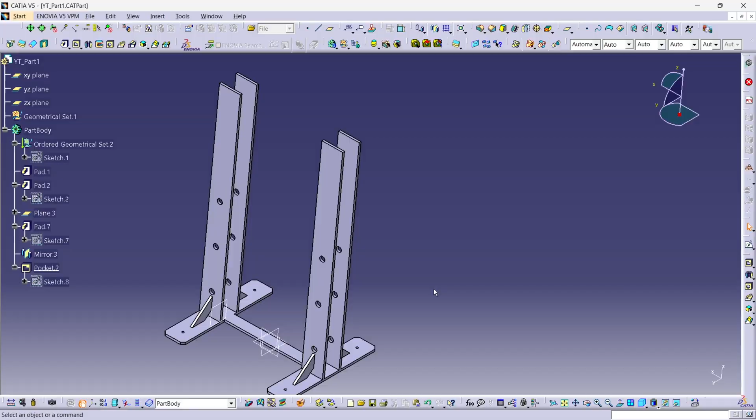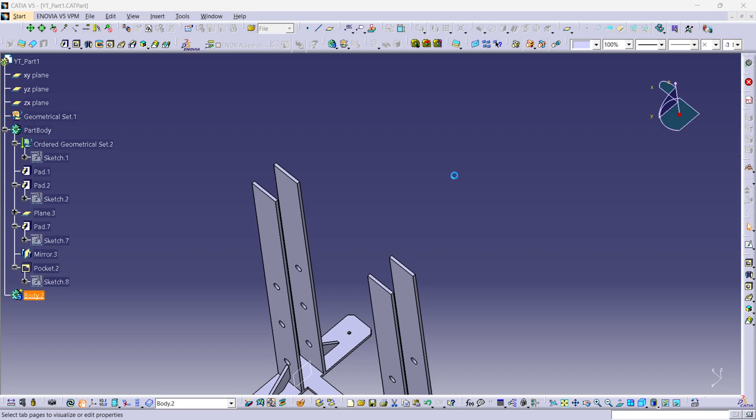Okay, so now we need to close this upper hatch, right? So for that we need to create another body. We will go for insert, select insert body, and name it as upper portion.

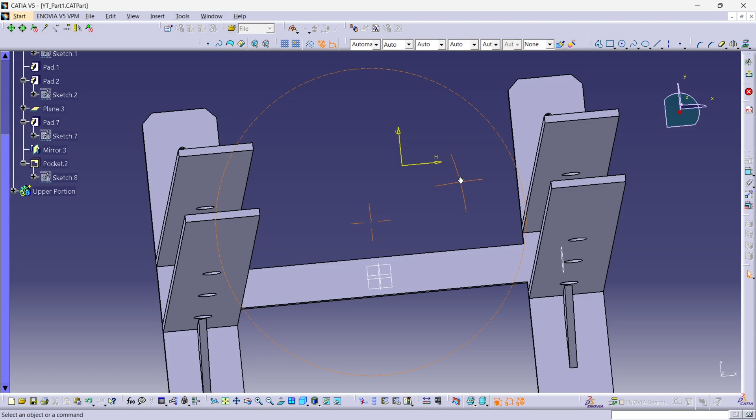Okay, select this surface directly and go for sketch. Now the question is how to cover this.

Okay, so first of all we will select the outer boundary, like this. That's a rectangle that I have created. Now I'm gonna select this, and this two should be coincident to each other. Oh no, sorry, wait a moment. Like this, right?

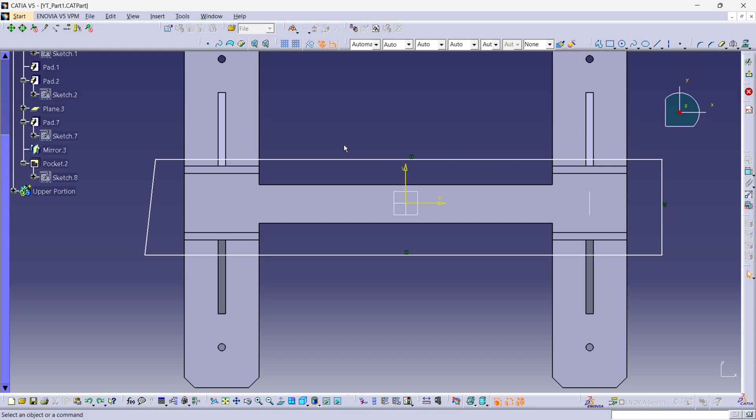Okay, we have another approach for that. Select this thing called projection, right? Yes, project this, this, this. It's done. Remove this one which you don't want.

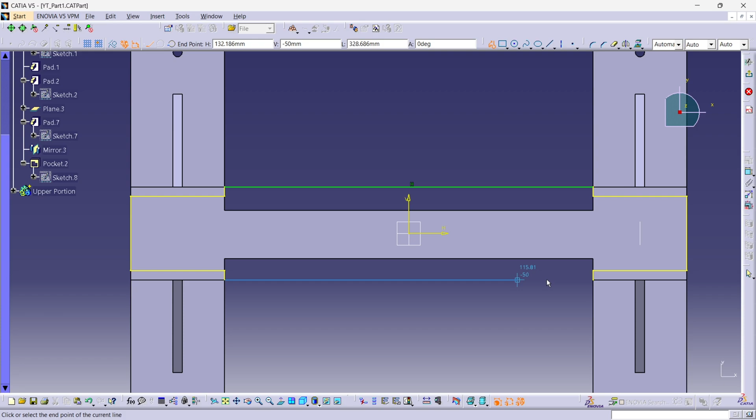Okay, so the yellow line represents our outer boundary. I just need to select this two to connect. That's it. Other one as well, the same. Escape, and we are good.

Come outside from here and just make an extrude, or we can say pad, in the lower direction with the dimension called 10, right? So it's a good thing.

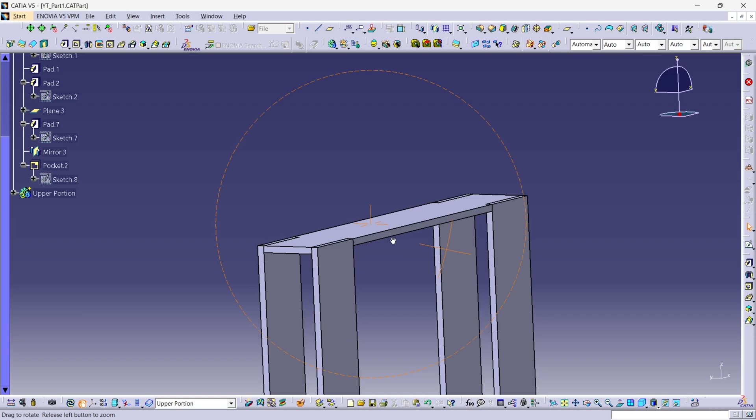Now we need to check what is remaining. I believe this is the remaining part only. So we'll create this particular thing. Okay, the 60 in the length, because this is not yet made.

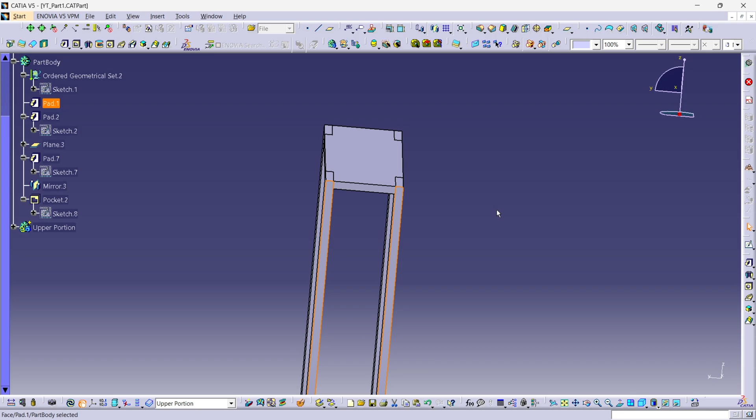Select the surface of this outside, go for sketch, and we need to create two rectangles like this. First of all we'll just select and create only one, then we'll have a mirror of that.

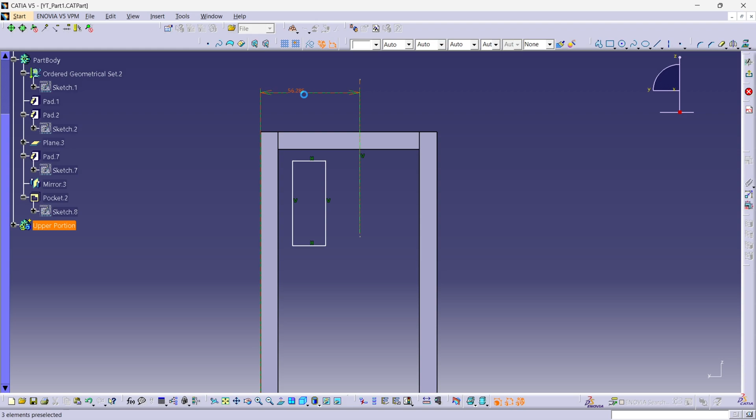The distance between the axes should be 50, right? Length should be 60 up here, and the width should be 14.

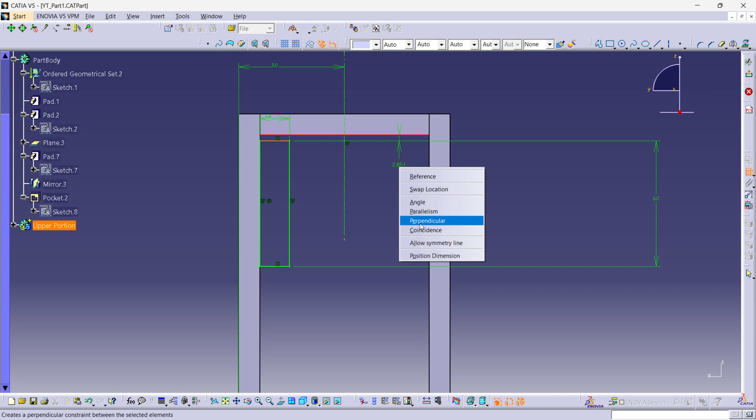Okay, now I just need to drag and drop up here, or make sure it is coincident with the frame. Coincident, that's it. Select this sketch, go for mirror to this particular plane, and there we go.

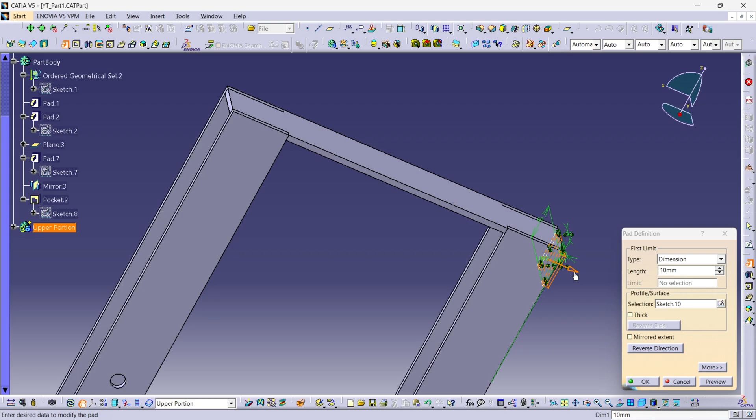Again the same thing, we'll go for padding, and we'll go padding to the next surface, which is this one. Okay, it's not accepting that. Up to the last. Impossible.

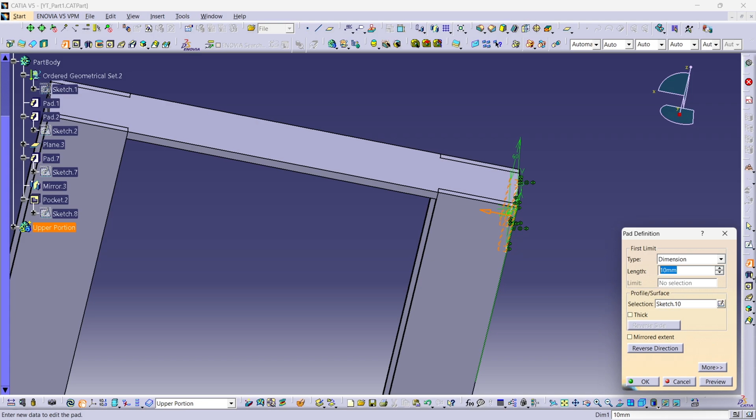Okay, so for now we'll go for the option called dimension in the reverse direction, and the whole length is I believe 500, right? No, it's more than that. Let me check.

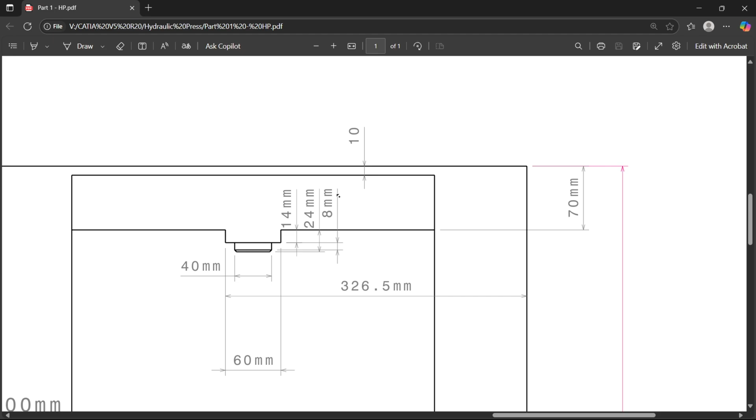Sorry, not here. Padding, right? So come up here and let's check the distance up here. The whole thing is... okay, there's none mentioned up here, so we need to go back in the design mode and check.

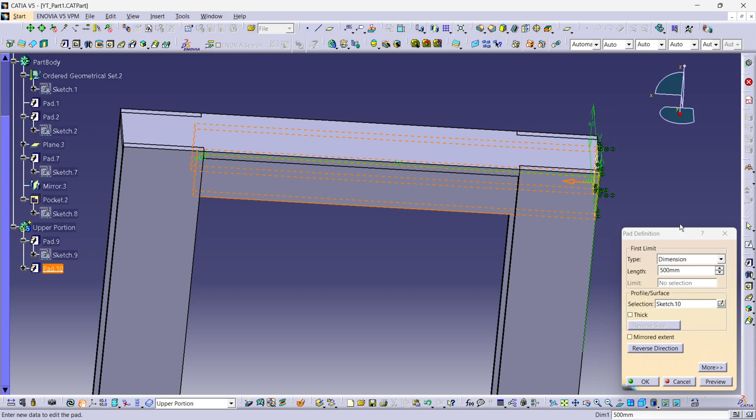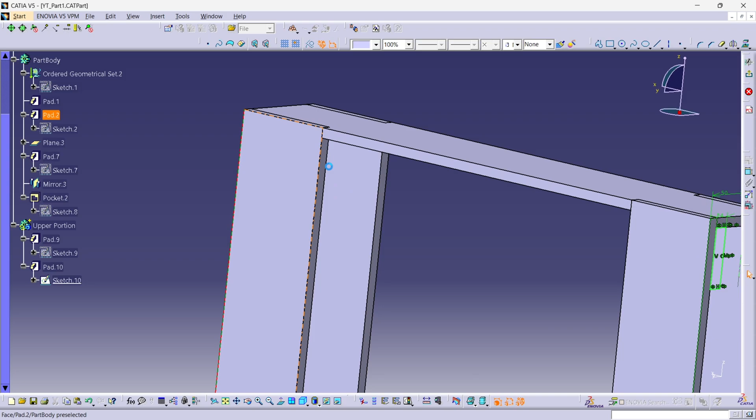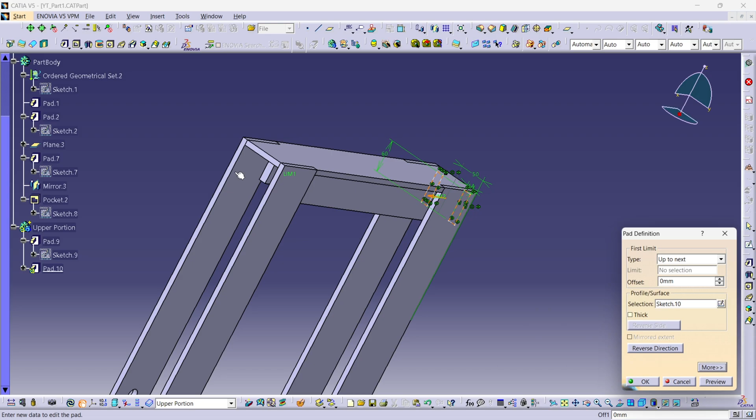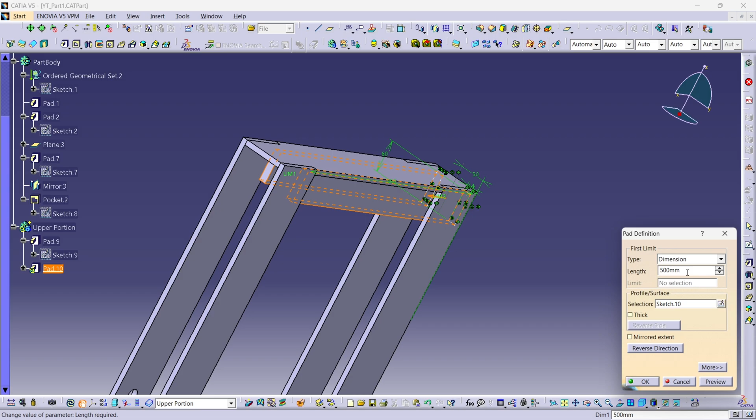Okay, fine, that looks good. Now you can proceed with the another thing, which is this one, right? Which particularly looks like this.

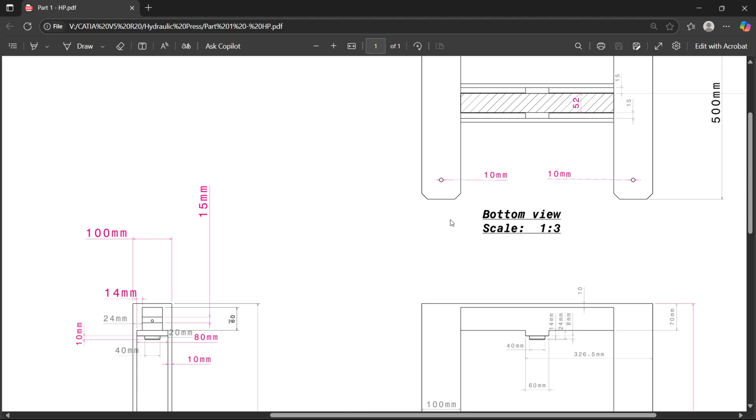So we'll create that right here. We can actually hide this upper body so we can see only this one to avoid the confusion. So again, I'm hiding this.

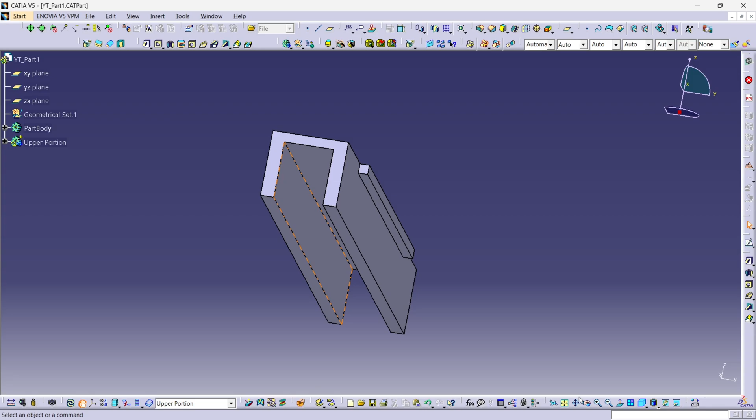So there are two ways. Either you can go up here to check the hidden part, right? So I'm just gonna go for show, and it's here. Okay, so for now we need to make this one, yeah, this one.

So the attaching clips are there, meaning it's attached to the frame itself, right? So yeah, let's just go and make that one here. For that we need to create a plane, which should be inside this thing, right?

Select this plane which we already created, and go for the option called plane. Make it in the opposite direction as 40 mm. Okay, so it is inside, yes, correct, it is inside this thing.

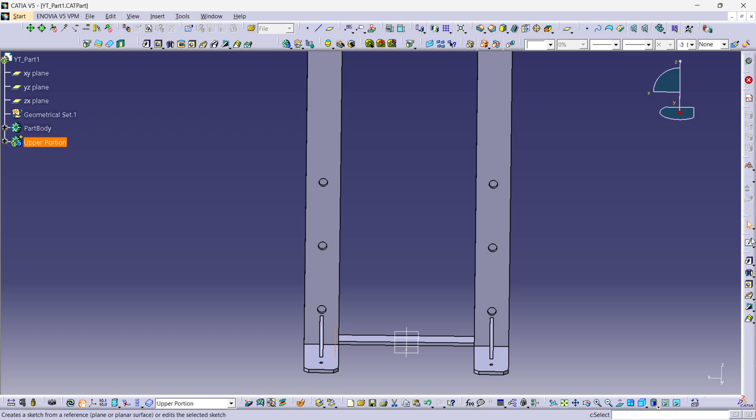I'm just gonna go select that particular plane, and go for design or sketch. Up here again, make a rectangle, simple. Okay, inside that I need a circle.

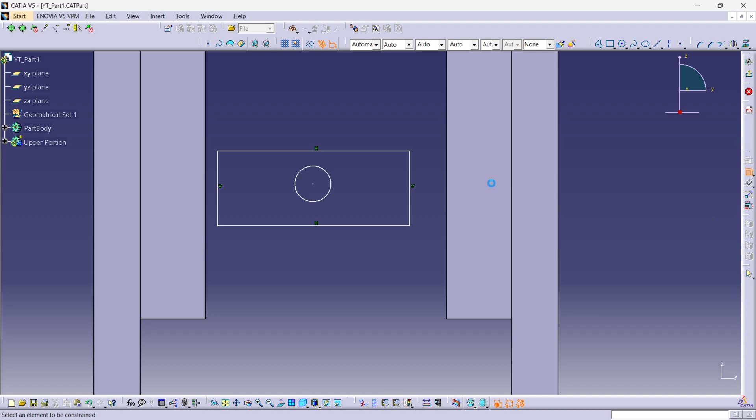That's fine. Time to make it constrained. Select this, control press, go for coincident. Same thing for the other side.

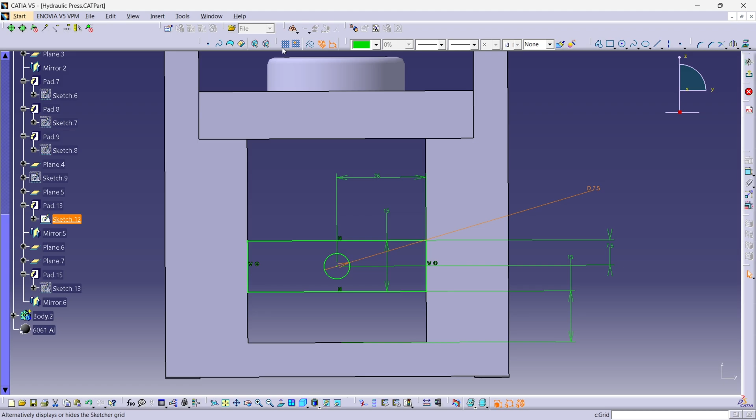Dimension of this is 7.5, okay, and the distance from this to this, that's a good question. Let's see from here how much it is. It is now 15 centimeter, sorry, mm. It's 15.

Okay, so that's fine, and it's 15 mm. And this is also, I just consider it as 15, and the distance from this to the center point should be 15 by 2.

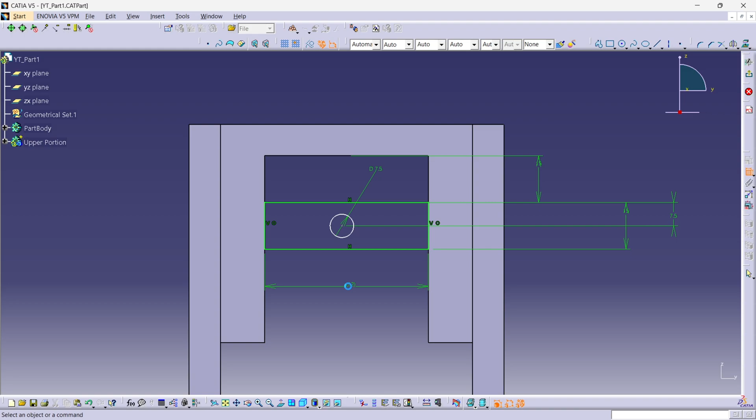Let's check the distance from this to this. It is 52. So 52 by half is 26, and that could be the midpoint, and that's it. Once you do that, go for exit. Now it's in this plane.

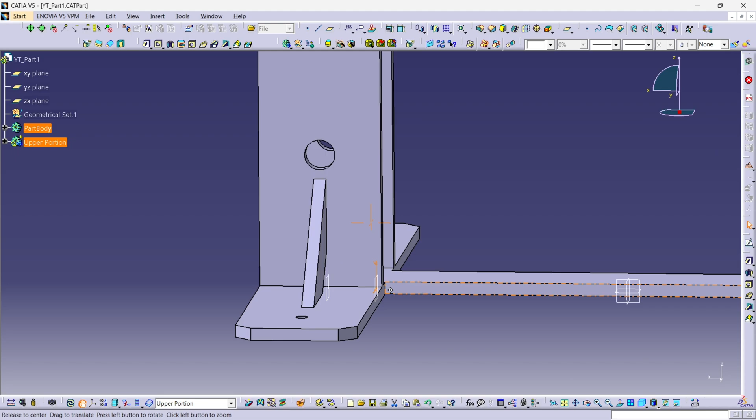So all I wanted to do is just create another plane up here. Select this, let's check where we are right now. We are here, no worries. Select this plane, go for this again, this time 20. So this is the one which we have just created.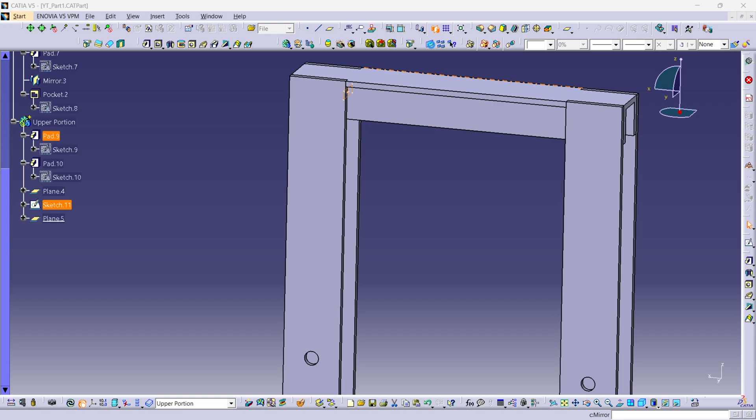So why do we need that? We need to make a mirror, right? So let's select the sketch, which is this one. I'll go for mirror. It says... let's just see. Oh no, not this one, not like this.

Let's just go for first, let's see if we can first make a padding of it, and it's 10 centimeters. Once we do that, let's just go for 5. That would be appropriate. 5, and go for mirror.

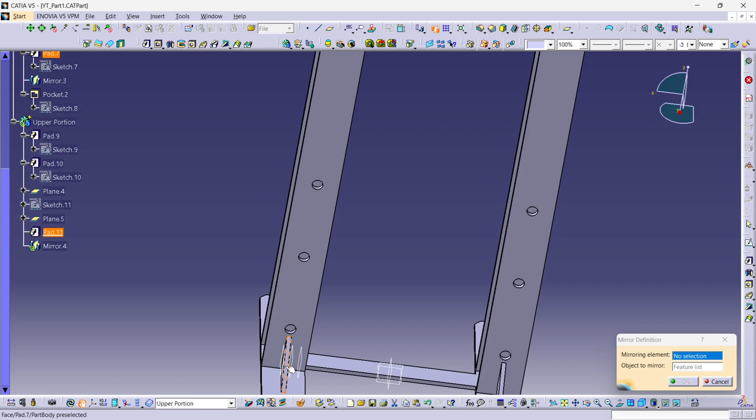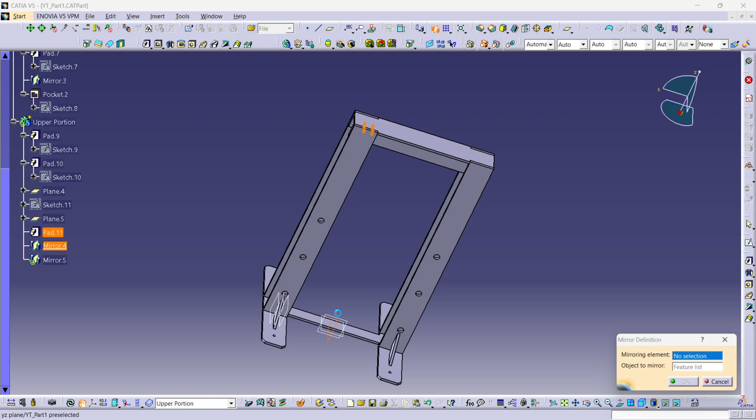To this plane, and let's see how it looks. Yep, perfect, that's it. Right now again, I wanted to mirror this too, which is pad and mirror to another plane, which is this one, and there we go. Create. Okay, it is there.

And this time I want a plane which is coming from here. Let's just find the distance from this to this first. This plane to this plane.

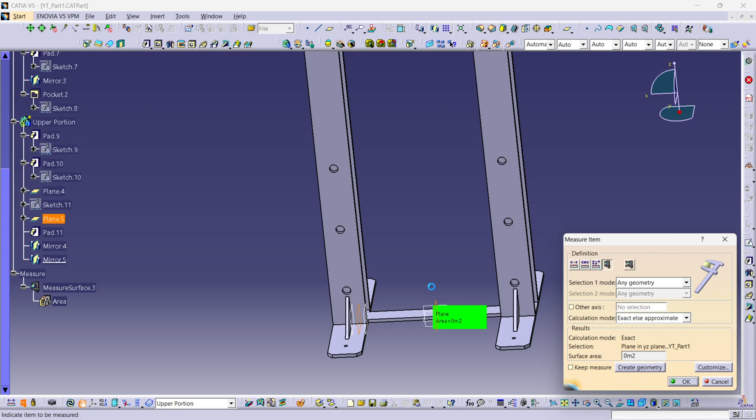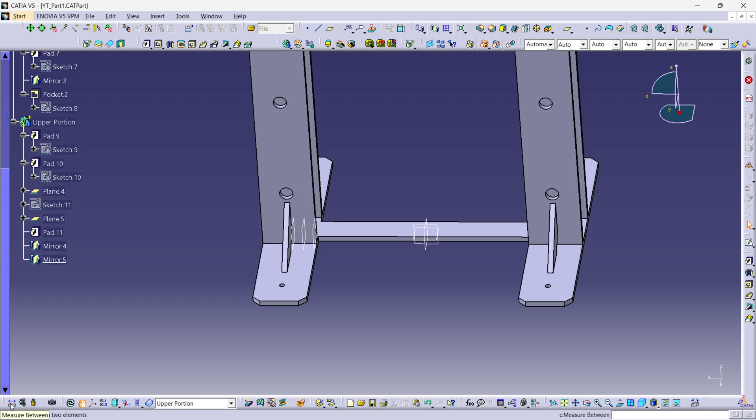Measure between this and this is 2 to 6.5. That's a good feature, you can always have that. It's called measure between, 2 to 6.5. Got it. Select the plane, 2 to 6.5 in the other direction, which looks good, right?

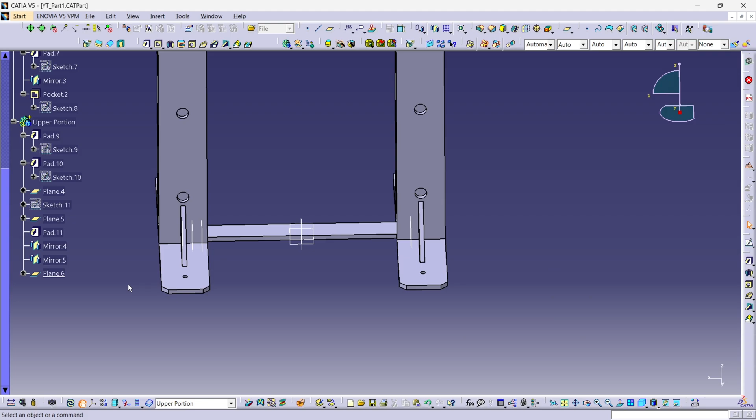And click on preview. This time select the mirror part, go for... it cannot be transformed. Why so?

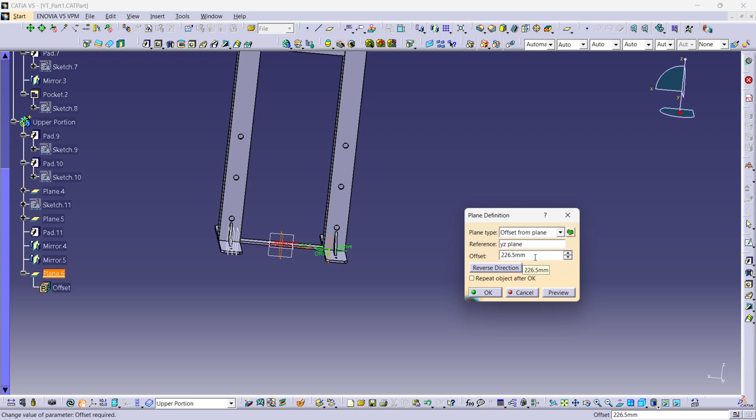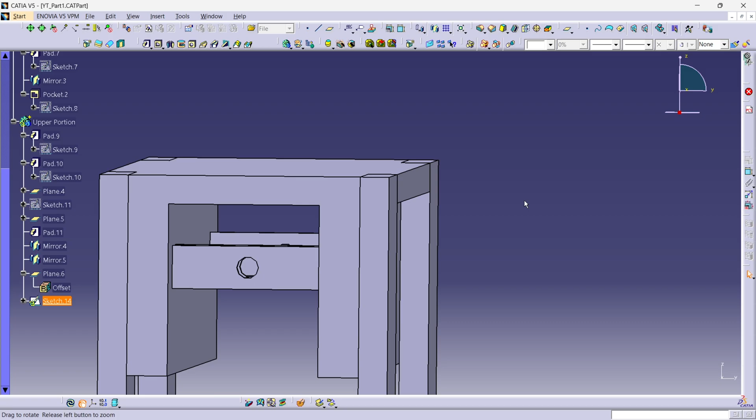Select this plane, go for sketch, and this time just select like this and go for projection, right? Go for out, and you can just extrude that part like this in the other direction, 5 mm, preview, and done. So similarly, we have created these 4 plates inside the structure, right? And that's it.

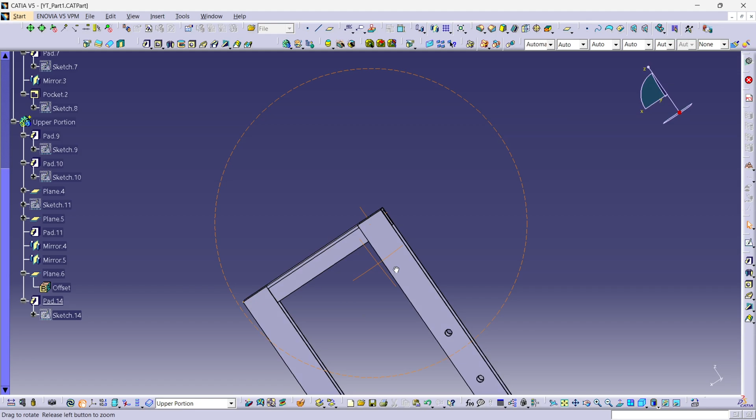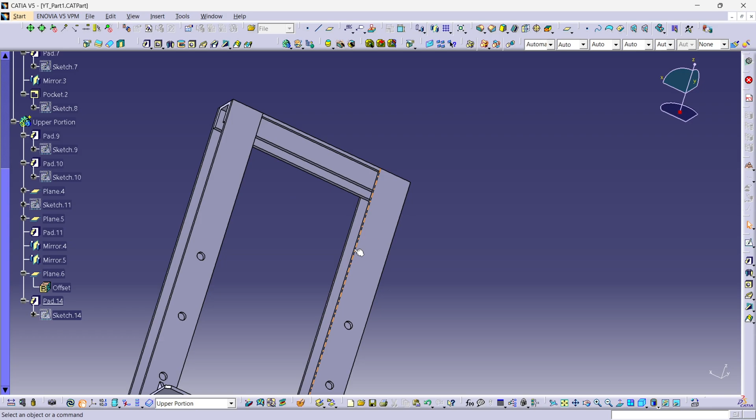Now we'll create this thing. So this structure is rectangular and this is circular, right? So for now we need to create the platform where this shaft, or you can say the rod, will attach, right? So for now, just hide the main body, and just select this thing, go for sketch.

Here we need to create a profile, make it coincident with it, and coincident. Distance between these two is, let's consider 60. And the width is 14. Got it.

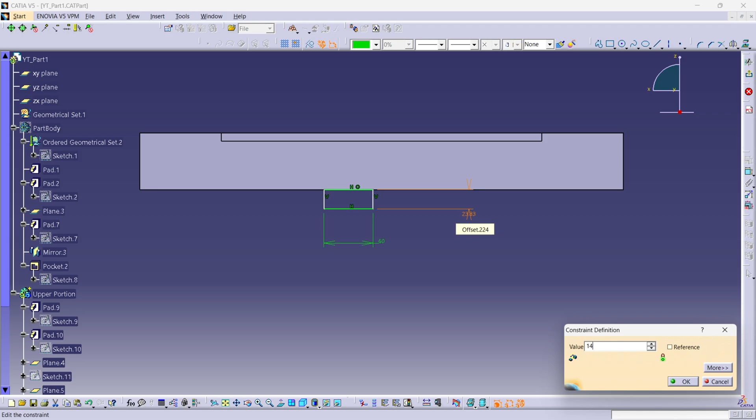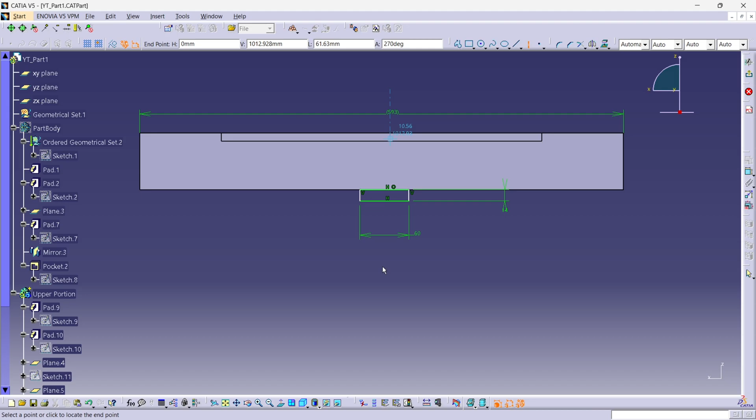And the next thing that is required is that it is in the mid distance, right? So we need to check this and this first. It is 593. So let's just make an axis first here, so we can determine it. Axis, and this should be a distance of 593 by 2.

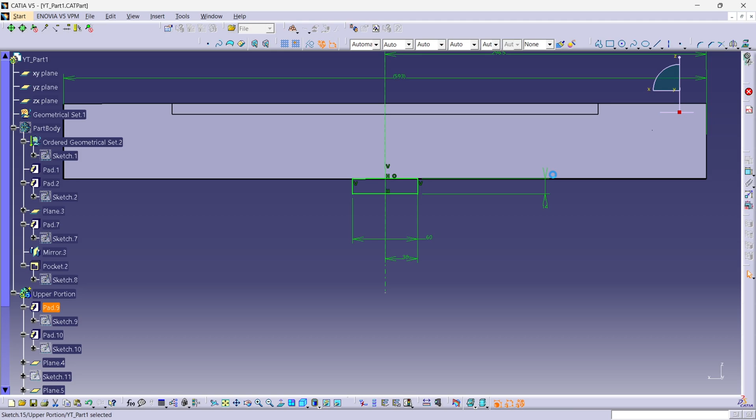And this and this should be equidistant, meaning 60 by 2 is 30. Now it's in the center. That's it, looks good. Go for extrude now, or add. Come on, and it should be in the other direction, up to the last, you can say.

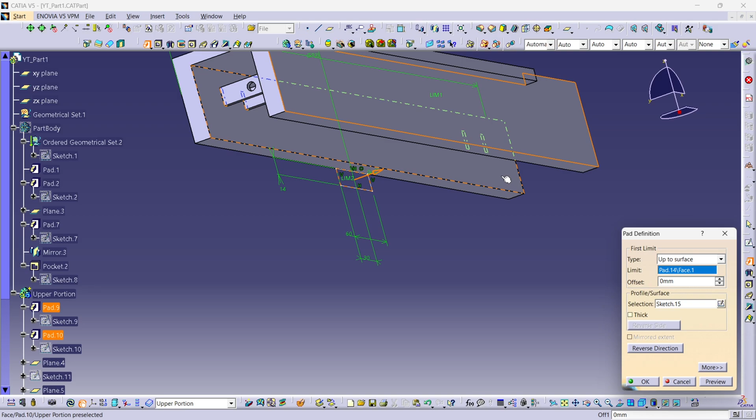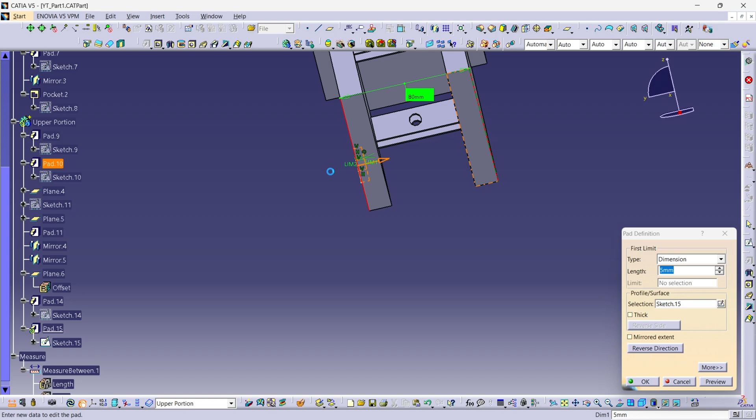Let's just go for surface. No. Okay, let's just come again, go for extrude, and let's just see the distance from here to there. Consider checking it with this. Nope, not this one. This part to this end is 80. Got it, so 80 in extrude. Fine, this is also a good technique.

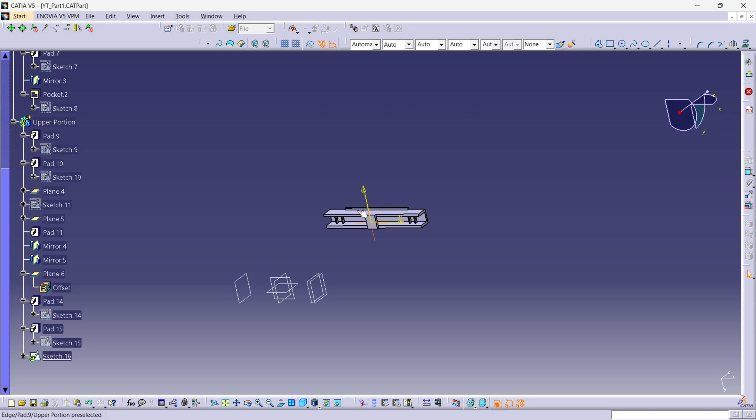All good. Now we are going to make a circular thing up here. So this is a very useful thing. That's the reason why I have hidden the other design, and the main thing which I mentioned earlier is to avoid confusion, I made this a later part, right? This thing, so yeah, that's the thing. So now we'll create a circular thing up here that can hold the shaft.

This is the circle. There's one more inner circle, but for that we need to know the dimension, which is 40 in the diameter. 40. Sorry.

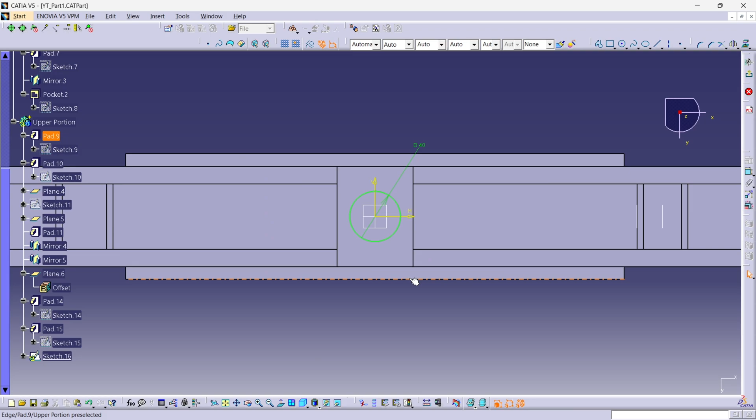The sketch, select this and go for constraint. 40 in the diameter, and distance is 30. Okay fine, but oh, yeah, it's in the mid, right? So no matter what, it's in the mid, so we don't need any more constraint.

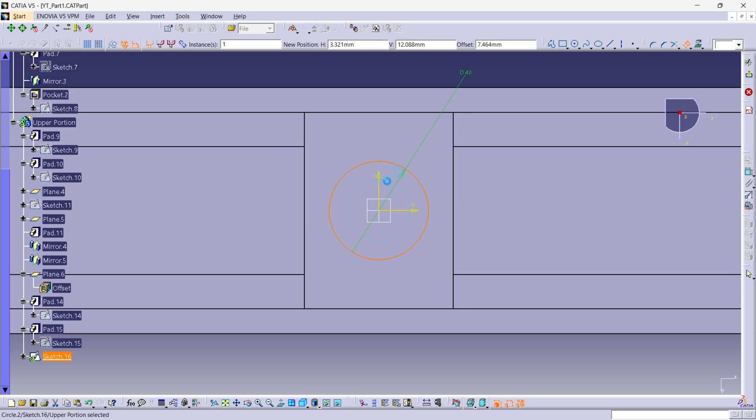Okay, so that's it. Now we will go for the one command called offset, that's a very useful command that is used. This offset, yeah, this is the offset. We'll go for offset inside, and the distance should be 5 mm. That's it. We'll go for extrude now again.

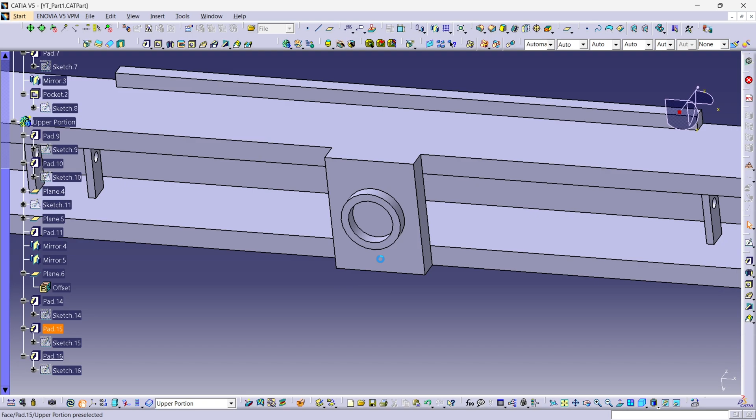It should be 8 mm only. Go for edge fillet. Select this thing, go for 2 mm. Same for the other end. Preview, and that's it.

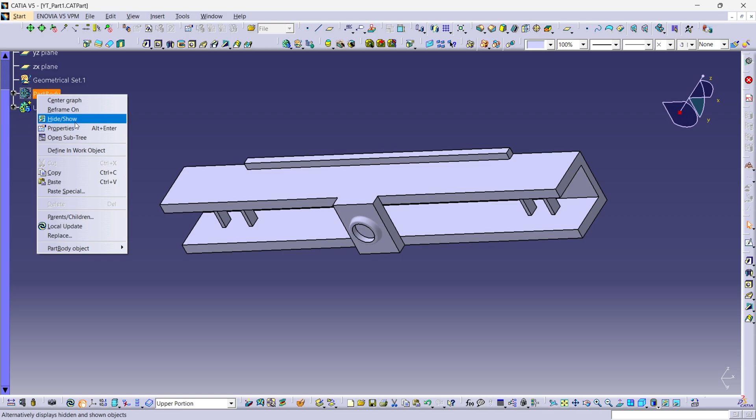It's done. Now we'll go for show, update all thing, and it's now done. So part 1 of this design is complete.